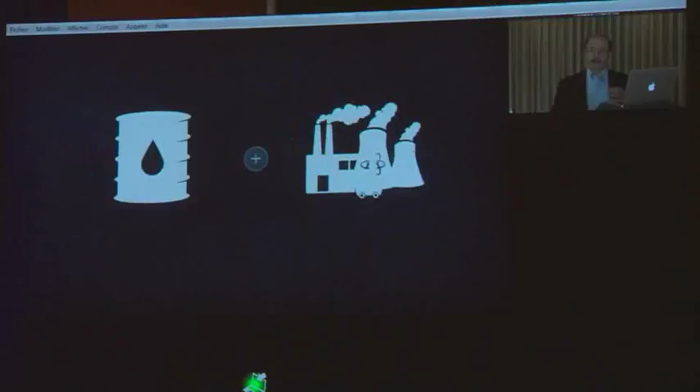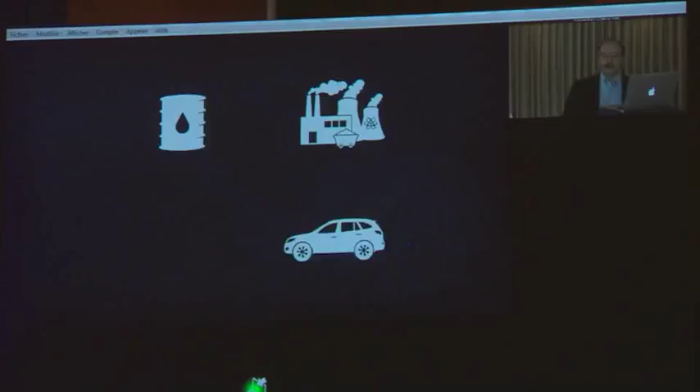And switching from the old fire to the new fire means changing 2 big sectors, oil and electricity, which each emit 2/5 of the fossil carbon into the air. Now, these sectors are less than 1% connected in the United States, less than 5% in the world, but the uses are similarly concentrated. In the US, for example, 3/4 of the oil fuels transportation, 3/4 of the electricity powers buildings, and the rest of both runs factories. So very efficient transport and land use, buildings and factories can save oil, and the coal that still makes 2/5 of US electricity, and the natural gas that can displace both of them.

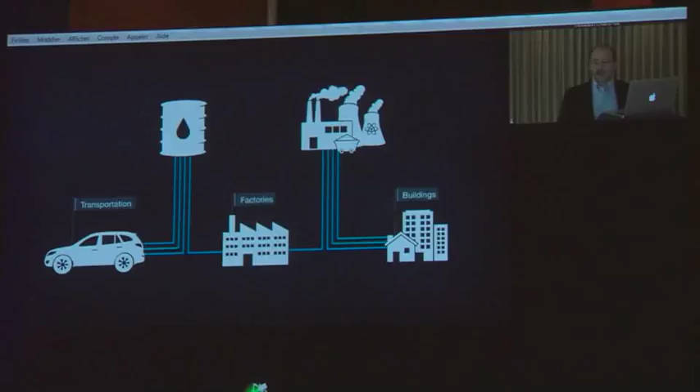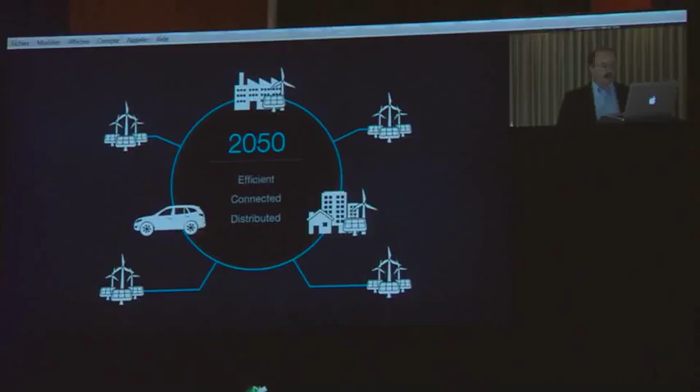But today's energy system is not just inefficient, it is also disconnected, aging, dirty, and insecure, so it needs refurbishment. By 2050, though, it could become efficient, connected, and distributed with elegantly frugal autos, buildings, and factories, all relying on a secure, modern, and resilient electricity system. So the United States could eliminate its addiction to oil and coal by 2050 and also use 1/3 less natural gas while switching to 3-fold more efficient use and 3/4 renewable supplies. That is the transition I will summarize.

And we found that by 2050, this could cost the United States $5 trillion less in net present value than business as usual, assuming that carbon emissions and all other hidden costs are worth 0, a conservatively low estimate. Yet this cheaper energy system could support a 2.6 times bigger economy, all without needing coal or oil or nuclear energy.

And we showed that this transition would need no new inventions, and that getting the US completely off oil and coal and nuclear $5 trillion cheaper would need no act of Congress, but could be led by business for profit. Policy changes are needed, but they can be done administratively or at a subnational level, where we've long made most of our energy policy anyway. We have a less centralized system than in France.

So this energy solution could use America's most effective institutions, private enterprise co-evolving with civil society, sped by military innovation, to go around our least effective institutions. And whether you care most about profits and jobs and competitive advantage, or national security, or environmental stewardship, climate and public health, reinventing fire makes sense and makes money.

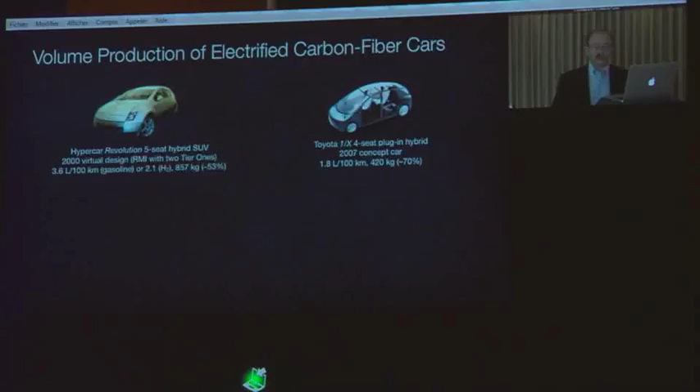In automobiles, the biggest oil user, 2/3 of the fuel use of a typical car is caused by its weight. And removing weight leverages 7 times larger fuel savings at the tank. 15 years ago, my team designed a halved weight carbon fiber hybrid sports utility vehicle, 4 to 6 times more efficient with a 2-year payback. 8 years ago, Toyota showed such a concept car with the interior volume of a Prius, half the fuel use, and 1/3 the weight, just 420 kilograms.

And now, 1 and 2 liter equivalent per 100 kilometer carbon fiber electrified cars are on the market from Volkswagen and from BMW, which confirmed that the carbon fiber is paid for by needing fewer batteries. An RMI spin-off company developed an even cheaper and faster manufacturing technology that made this carbon fiber car cap, sort of 1914 Italian style, in just 1 minute 8 years ago. You can tell from the sound it is extremely strong and stiff, and it's tougher than titanium.

But now this process can be used to make complex 2x2 meter parts in 1 minute, and it's in the global supply chain from Germany. If we made all US autos in this way, we would save half an OPEC or 1.5 Saudi Arabias of oil by drilling in the Detroit Formation, a very prospective play. And the cost of saving a barrel would be $18 and falling. That just buys the electrification of the car.

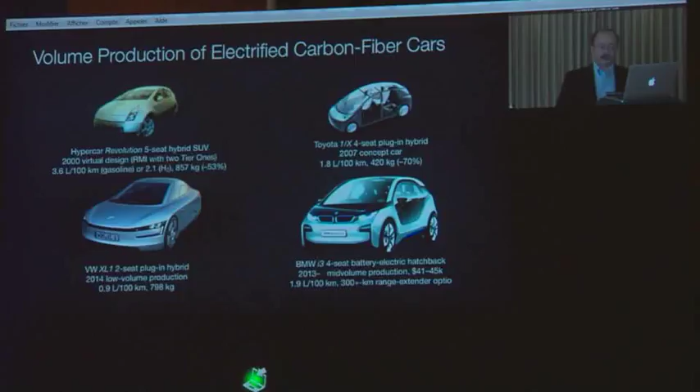The ultralighting is approximately free, paid for by a 2/3 smaller propulsion system and by radically simpler automaking, needing 80% less capital. Now, ultralight electric vehicles can spread and their prices can drop even faster with a temporary fee-bate, that is, rebates for efficient new autos paid for by fees on inefficient ones. So it would be a revenue-neutral form of the French bonus-malus system, which in its first 2 years tripled the speed of improving the efficiency of French automobiles.

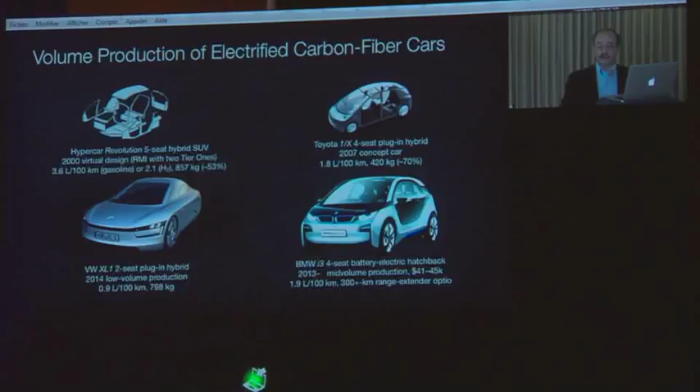In both heavy and light vehicles, today's military revolution in energy efficiency will speed all these advances in the civilian sector, which uses over 50 times more oil. Much as military R&D gave us the internet, the global positioning system, the jet engine and microchip industries. And that leverage can speed the path off oil so we need not fight over oil. And then our warfighters can have new missions in the Persian Gulf and the South China Sea. Mission unnecessary. They really like that idea.

Now, autos are not just becoming 4 to 8 times more efficient, they're also being driven less, even in Europe and America, where gasoline use has been falling since 2007. Generations X and Y tend not even to want to own a car because it's cheaper and easier not to. A young Londoner or Shanghainese on an evening out can combine many different modes using smartphone apps to bridge the once awkward gaps in the route by summoning ubiquitous transport services on demand.

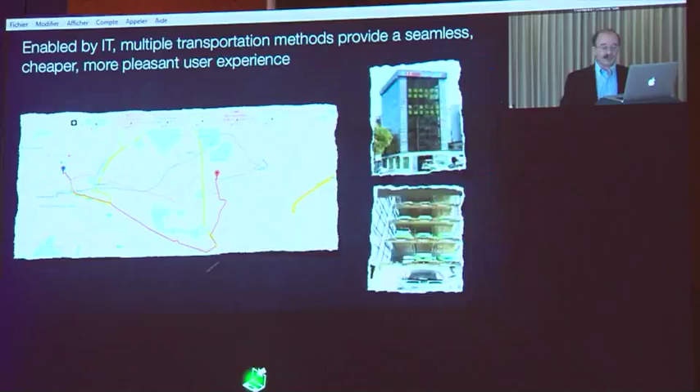As Tom Friedman recently said, the world's biggest media company, Facebook, owns no newspapers. The world's biggest hotelier, Airbnb, owns no beds. The world's biggest taxi service, Uber, owns no cars. They all just let you rent other people's underused assets. Seamlessly linking access options with needs makes you confident you will not need a car, but if you ever do, you don't need to own one. In some Chinese cities, renting a Kandi electric vehicle from this giant vending machine costs about $3 an hour.

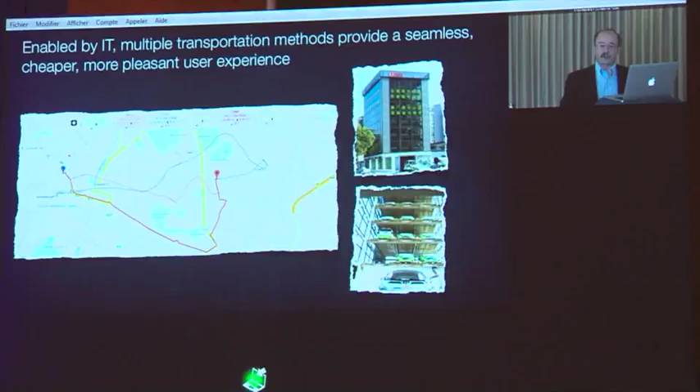Also, renting shared cars when you need them can boost their utilization about 10 times, and then probably double it again with partly or fully autonomous vehicles, like this Mercedes-Benz concept car. Google plans to release self-driving cars in about 3 years. The biggest US company, Apple, is developing them also. They're already legal in 4 of the United States, and they are the theme of next year's Dutch presidency of the European Union. Autonomy makes electric vehicles' total cost per kilometer 2/5 lower than that of fueled vehicles because their 10 times lower energy cost per kilometer more than offsets their higher capital cost.

So the mashup of mobility with information technology means radically fewer vehicles, all electric, driving fewer total kilometers. And shared electric vehicles providing mobility services could drive 1 million kilometers because carbon fiber does not dent or rust or fatigue. So autos are morphing from what we call PIGs, personal internal combustion, gasoline, steel-dominated vehicles, to SEALs, shareable, electrified, lightweight, autonomous service vehicles.

And their business and marketing case is strong, and they will further speed the day when cars use no oil. Meanwhile, China's 3,000 kilometers of bus rapid transit, BRT, may quintuple in the next 5 years. This is a low-tech, high-design, retrofittable innovation. It transformed this street in Guangzhou into the street on the right, carrying 800,000 riders each day.

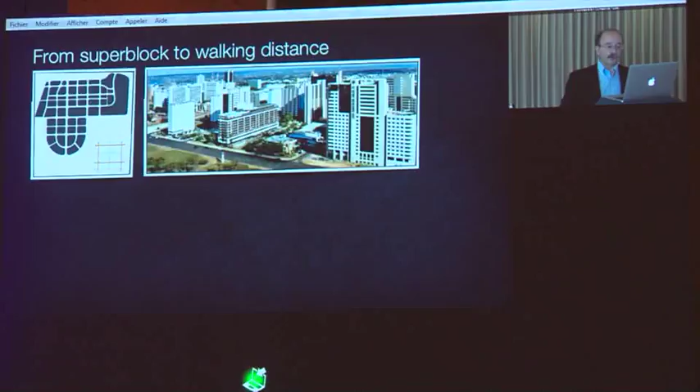Architect Peter Calthorpe is helping redesign Chongqing around 1.5 million pairs of feet, not cars, so driving will fall by 2/3. Each 13-lane super boulevard is replaced by a pair of one-lane, one-way streets. Between those pairs, a car-free BRT street, and between those, pedestrian and bicycle streets.

So the shift from a superblock arterial vehicle network to a capillary web builds a human ecology with vibrant commerce, rich social interaction, 1/3 less concrete, equal or better throughput, cleaner air, and happier citizens. The 53 cities already adopting this design will use little oil.

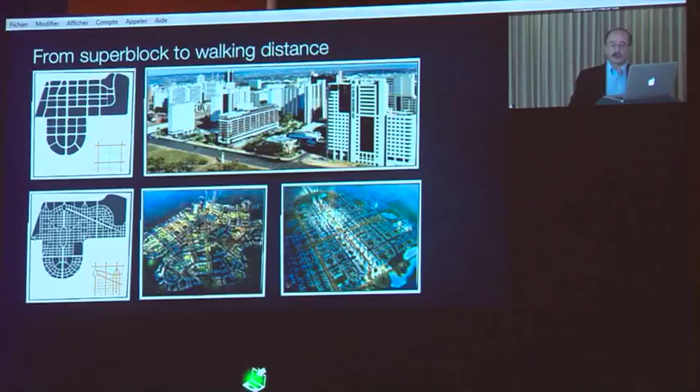And even in the car-dominated United States, such new urbanist smart growth plus mobility IT integration and charging real-time driving costs per kilometer, not per liter, can give us the same or better access with 46 to 84% less driving at lower cost with higher developer profits. So in 35 years, a far more mobile U.S. economy can use no oil.

Saving or displacing each barrel for just $25 rather than buying it for over $100 saves $4 trillion net present value. $12 trillion if we had counted just the hidden economic and military costs of U.S. oil dependence. So to phase out the oil, we can first get efficient and then switch fuels.

And those 1 or 2 liter per 100 kilometer autos can use any mixture of hydrogen fuel cells in green, electricity in yellow, or advanced biofuels in orange. The heavy lorries and airplanes can realistically use advanced biofuels or hydrogen. The lorries could even burn natural gas, but no vehicles will need oil.

And if we needed any biofuels, at most 3 million barrels a day, they could be made 2/3 from wastes without displacing cropland and without harming climate or soil. France could do much the same thing from crop wastes.

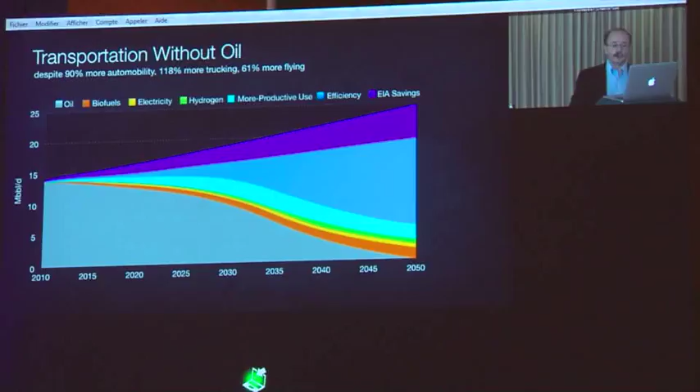Our team at RMI speeds these oil savings by institutional acupuncture, where the business logic is congested and not flowing properly. We insert little needles in selected points in partners like Ford and Walmart and the Pentagon to get that chi, that entrepreneurial juice flowing.

And this long transition is already so well underway that 5 years ago, mainstream analysts were starting to see peak oil not in supply, but in demand. Because like whale oil in the 1850s, oil is becoming uncompetitive even at low prices before it becomes unavailable even at high prices. But electric vehicles need not add new burdens to the electricity system.

Rather, when smart autos exchange electricity and information through smart buildings with smart grids, they are adding to the grid flexibility and distributed storage that help the grid to integrate varying solar and wind power. So electrified autos make the auto and electricity problems easier to solve together than separately.

And they converge the oil story with our second big story, saving electricity, then making it differently. And those twin revolutions are already bringing more numerous, diverse, and profound disruptions than in any other sector, as 21st century technology and speed collide head-on with 20th and 19th century institutions, rules, and cultures.

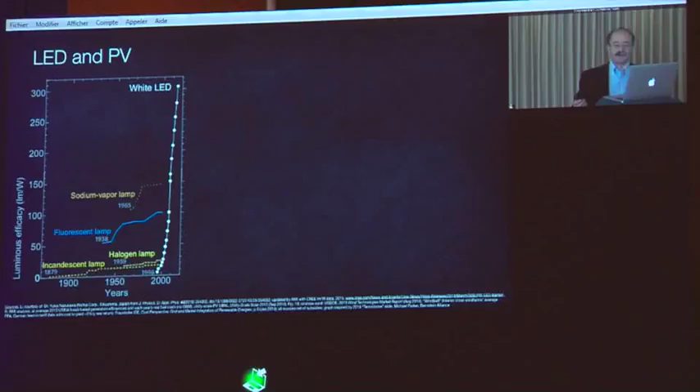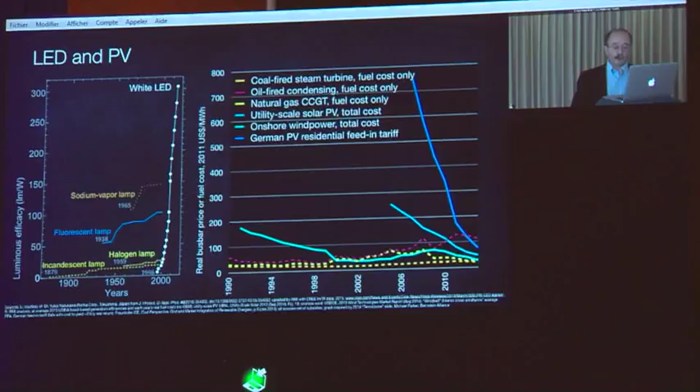The low aqua curve wind power is already highly competitive with traditional power stations and is causing nuclear plants to be shut down because many are now too costly to compete just on operating cost. Now, changing how we make electricity gets easier if we need less of it. Most of it today is wasted in both our countries, and efficiency techniques keep improving faster than we can install them. So the potential savings keep getting bigger and cheaper. The low-hanging fruit grows back faster than we can pick it.

But as buildings and industries start to get efficient faster than they grow, America's electricity use, instead of growing 1% a year as officially forecast, could shrink 1% a year, even with the extra use by the electric cars. And that's already happening. Our electric use peaked in 2007. It's fallen in 5 of the past 7 years. It's fallen by as much as 3.4% per year, weather adjusted, per dollar of real GDP. That was in 2012. And we can keep demand dropping by reasonably accelerating existing trends.

Specifically, over the next 40 years, U.S. buildings can triple or quadruple their energy productivity, saving $1.4 trillion net with a 33% internal rate of return. So the savings are worth 4 times their cost. Industry can also accelerate, doubling its energy productivity with a 21% internal rate of return. And to do all this by 2050, we would just need, over the next 15 years, to achieve nationally the level of efficiency adoption already achieved in our northwestern states 10 years ago.

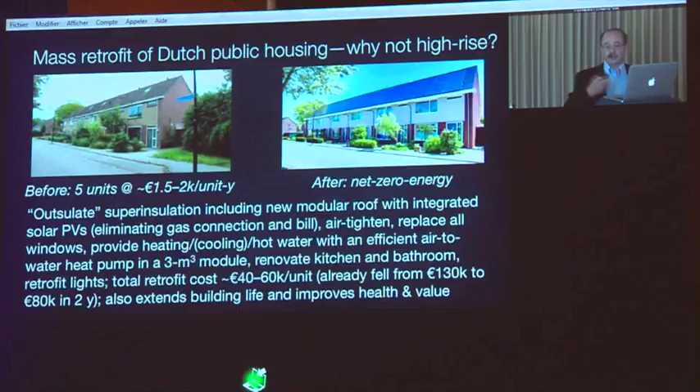And by industrializing the retrofit process in the first 11,000 units, these innovators expect to show no need for subsidy. They would finance the retrofit out of the saved energy. Integrative design can also raise the $500 billion of conventional energy saving potential in U.S. industry. Dow Chemical, for example, invested $1 billion in efficiency and already has returned $9 billion. But there's more to do.

For example, 3/5 of the world's electricity runs motors, half of that runs pumps and fans. Those things can all be much improved, as can the motor systems. But first we should capture bigger, cheaper savings normally ignored, not in any official forecast or study yet. For example, pumps, the biggest use of motors, move liquid through pipes.

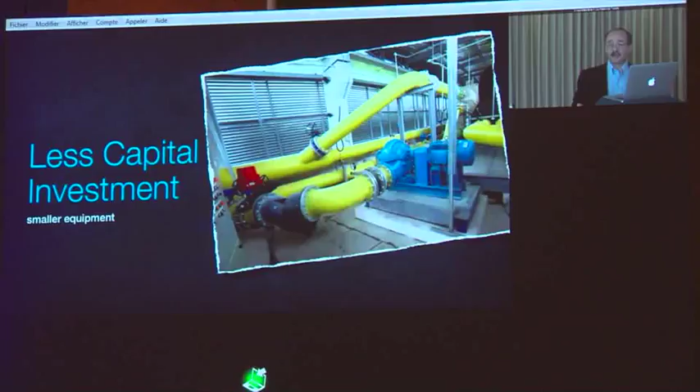A typical industrial pumping loop, though, was redesigned to use at least 86% less pumping energy, not by getting better pumps and motors and controls, but just by replacing long, thin, crooked pipes with fat, short, straight pipes. That also shrinks the pumping equipment and its capital costs. This is not even a new technology. This is rearranging our metal furniture as designers. In my own house, it recently saved 97% of pumping energy in some new piping.

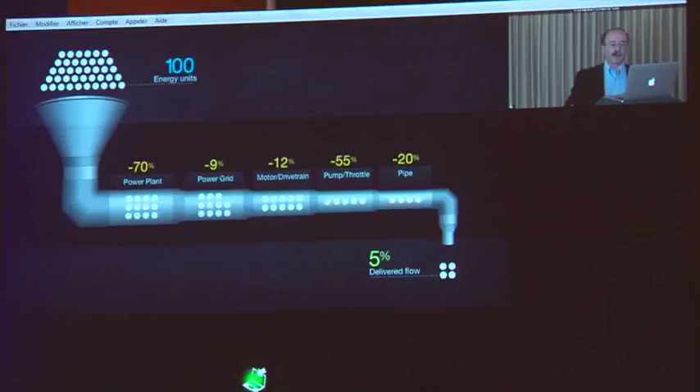So what does this mean for the electricity that is 3/5 used in motors? Well, from any fuel burned at the power plant to the end use, many successive losses compound, so only 1/10 of the energy in the fuel comes out the pipe as flow. But now turn those compounding losses around backwards and they become compounding savings from right to left. And every unit of flow or friction you save in the pipe saves 10 units of fuel cost, pollution, global weirding at the power plant, and the components get smaller and the cost goes down.

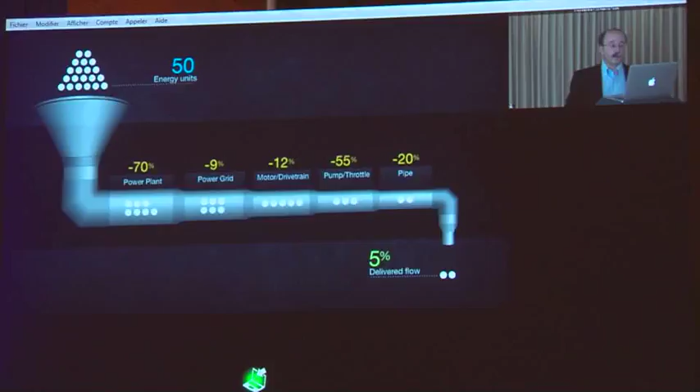We have lately found such snowballing energy savings in over $40 billion worth of diverse industrial redesigns in many sectors. Typically, our retrofits save about 30 to 60% of the energy with a 2 or 3 year payback, while in new designs, new facilities, savings are about 40 to 90% and the capital cost almost always goes down. We have found this, by the way, also in France.

And just in 2013, China added more photovoltaic capacity than my country has added since we invented it 61 years ago. In 20 of the United States, companies will install photovoltaics on your house's roof with no down payment, soon perhaps cash back, and beat your electric bill. Deutsche Bank says this will be profitable in 4/5 of the world in 2 more years. Bypassing power companies the way mobile phones bypassed wireline phone companies gives electricity executives nightmares and venture capitalists sweet dreams.

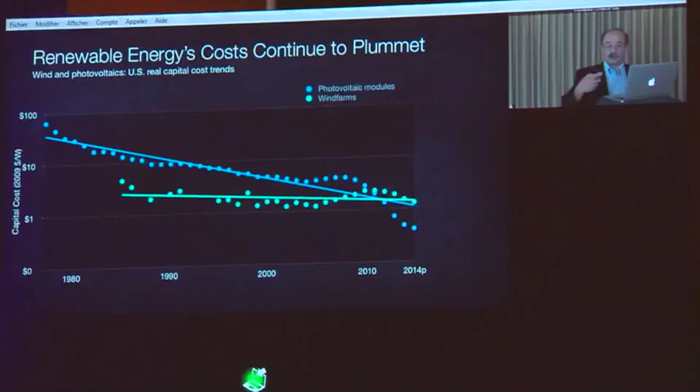Batteries also are getting rapidly cheaper, so more customers can choose and are choosing, say in Hawaii, to drop off the grid. So the old utility business models have no place to hide. That's why Barclays downgraded the whole U.S. utility sector, which now pays 200 or 300 basis points more for capital than solar installers do. Can fossil fuels really win this competition, where your new oil or gas well makes my next one cost more, but your next solar panel makes my next one cost less?

Bloomberg thinks not, and projects that in the next 15 years, the fossil and nuclear plant growth will cut in half, not counting bigger retirements, while renewable growth doubles or triples. And the market evidence is in each of the past 4 years, modern renewables, not counting big hydro, have added over 80 gigawatts per year and got over $250 billion of annual investment.

No wonder Germany's biggest utility, E.ON, is splitting in two to focus on the new opportunities and give the old ones they can't make money on back to the shareholders. GDF Suez and RWE have announced a similar shift of emphasis without the split. So it's really time to discuss whether electricity companies should ignore, deny, resist, diversify, hedge, transform, or decline. And that choice is especially urgent for Électricité de France, which had serious financial problems even before rescuing Areva. The cheaper renewable power gets, the more we buy, so the cheaper it gets, so the more we buy, and so on. And these modern renewables scale up in a completely different way.

Instead of a cathedral-like giant power plant that takes years to license, design, and build, with about the same capital, we can build a factory that each year thereafter produces enough solar cells to generate each year thereafter the same electricity that the cathedral ultimately will. So solar output worldwide is scaling faster than cell phones.

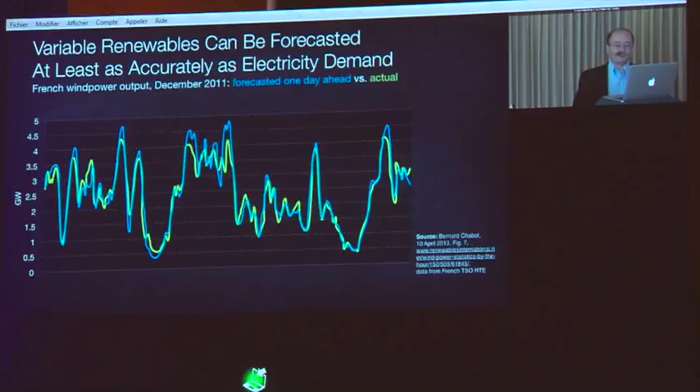And then, of course, the reason we built the grid is that no generator is 24/7. They all break. And when a giant coal or nuclear plant breaks, 1 billion watts vanishes in milliseconds, often for weeks or months, often without warning. So grids routinely handle this intermittence by backing up failed plants with working plants.

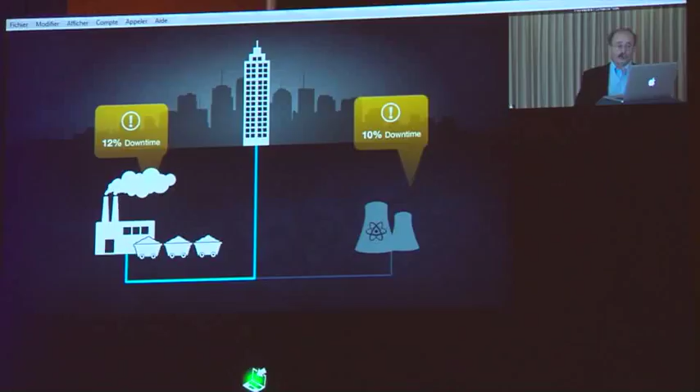And in the same way, but often at lower cost, grids can handle the forecastable variations of solar and wind power by backing up variable renewables with other renewables of other kinds or in other places. Thus, highly reliable power can come from a portfolio of largely or wholly renewable sources when they're forecasted, integrated, and diversified by type and location.

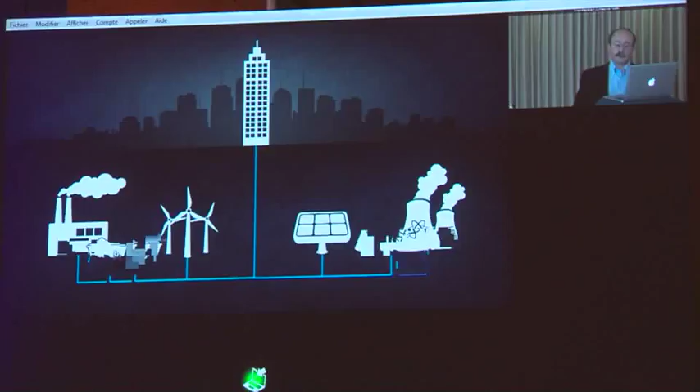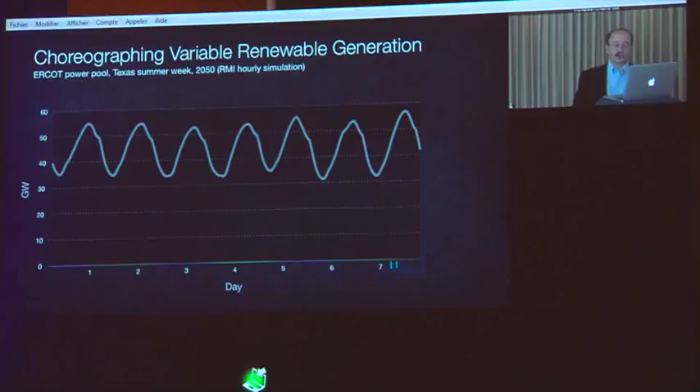Let me illustrate this with a simulation from the state of Texas, which has an isolated grid not connected to the rest of the United States. Its expected 2050 summer electric loads can get much smaller and less peaky with efficient use. Then we can install enough wind power and photovoltaics to make 86% of the annual electricity and get the other 14% from dispatchable renewables you can have at any time, like geothermal, small hydro, solar thermal electric, feedlot biogas burned in existing gas turbines, burning municipal waste, burning obsolete energy studies.

Now we have 100% renewable supply. It doesn't perfectly match the load. We have both surpluses and deficits. But we can match it to the load by putting the surplus electricity into two kinds of distributed storage: ice storage air conditioning and smart charging of electric autos, both fully deployed, and then recovering that energy when needed and filling the last gaps with unobtrusively flexible demand. Then only 5% of the annual renewable output is surplus, so the economics should be quite good.

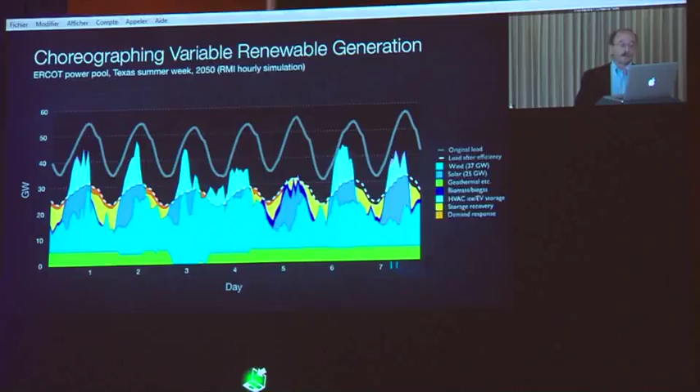And this is not only a theory. Actually, some national grid operators already operate in this way. Germany last year was 27% renewably powered, Italy 33%, but 4 other European countries with modest or no hydropower already got about half their electric consumption from renewables. They added no bulk storage, but they got superior reliability. For Denmark and Germany, 10 times as good as the United States. So the operators have learned to run these grids the way a conductor leads a symphony orchestra. No instrument plays all the time, but the ensemble continuously produces beautiful music.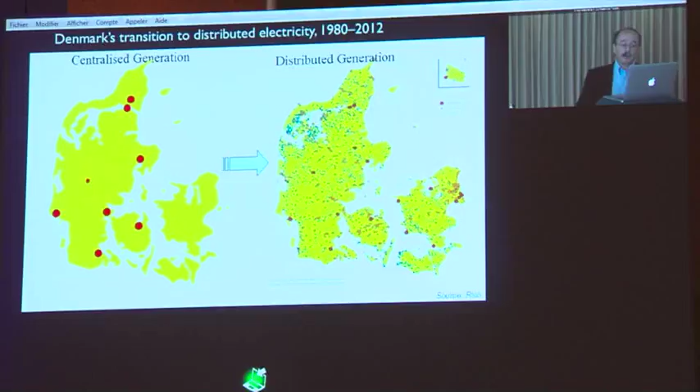And a key to this is also making power generation the right size for the job. The most advanced example is Denmark. Over 3 decades, they've shifted from centralized power plants, mainly burning coal, to distributed wind turbines, 86% locally owned, and cogeneration from agricultural wastes. Denmark is planning 100% renewable energy of all kinds by 2050 at essentially no extra cost. They're on track. And they're reorganizing their grid in a cellular way that makes cascading blackouts impossible.

We need to do something like this in the United States, where however we rebuild our aging, dirty, insecure electricity system by 2050, it's going to cost about the same. But whether we do more of the same, or new nuclear and so-called clean coal, or centralized renewables or distributed renewables, we get profoundly different risks at the same costs. Risks around national security, fuel, water, finance, technology, climate, and health.

It turns out the solution that best manages all of these risks and that makes big cascading blackouts impossible is to reorganize distributed renewables into microgrids that normally interconnect but can split apart fractally at need, stand alone and serve critical loads, and reconnect seamlessly. That is the Pentagon strategy for powering military bases. It's how my house works, and it costs about the same. So it gives us better national security, customer choice, entrepreneurial opportunity, and innovation.

So to summarize the electricity story, together efficient use and diverse, distributed, renewable, resilient supply are starting to transform the sector. Utilities used to build giant coal and nuclear plants, a little gas, maybe efficiency and renewables, and we rewarded them, as 34 of our states still do, for selling you more electricity. But now, especially where regulators instead reward cutting your bills, the market is going the other way up.